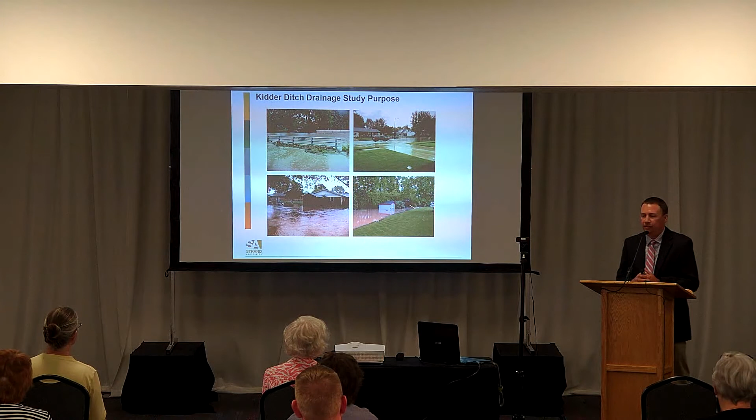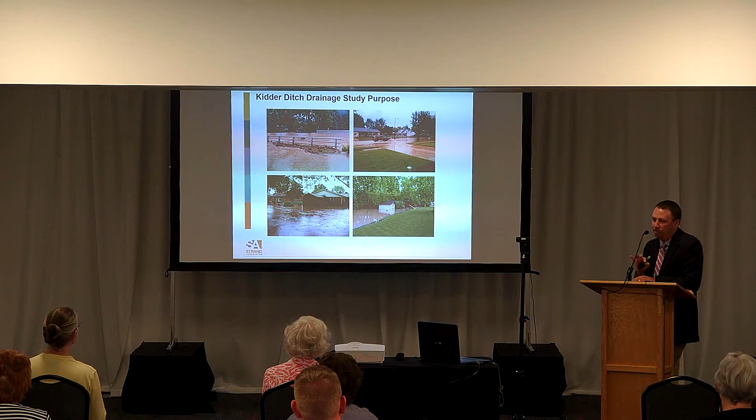So the purpose of the drainage study, we've got pictures of flooding here. Some of these came from the city, some of these came from you all as part of our outreach efforts. It seems like the primary issue that is being dealt with throughout the watershed along the ditch is flooding issues. So some of the pictures here, I believe the picture on the top left is the bridge at Maple Crest Drive, which has been prone to overtopping on several occasions.

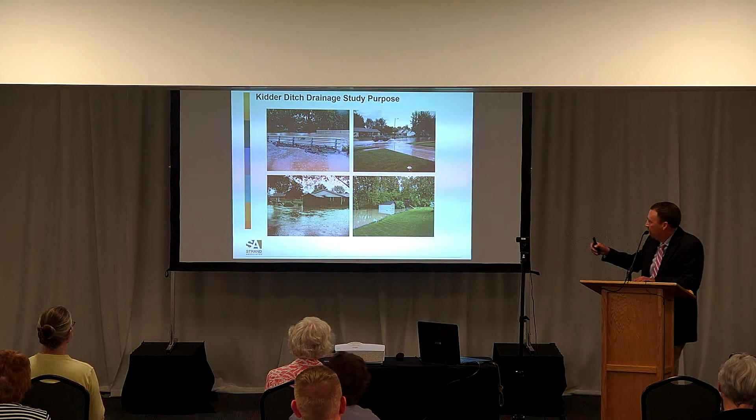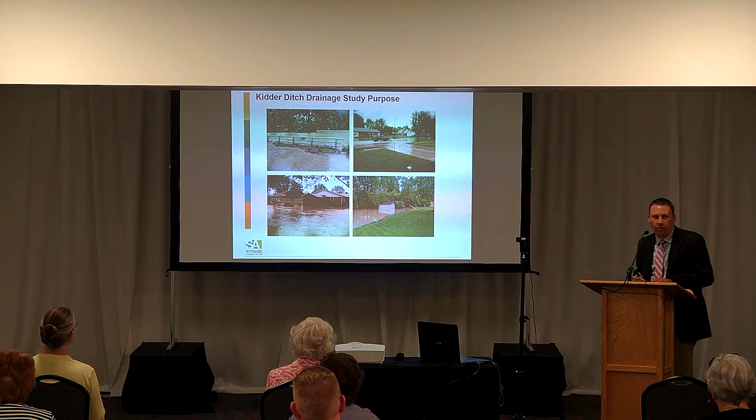Picture on the top right, some of the flooding along the streets that happens during severe rainfall events. And then along the ditch itself, the bottom two pictures, as that water comes up in the ditch, how it does extend out into the yards and then recedes after the rainfall event. So the primary focus of our drainage study really is evaluating the flooding conditions along the ditch itself.

So the limits of the study, this map went out, I think, as part of the invitation to this meeting, that just show the limits of the study. So on the map here, Kidder Ditch flows in a southern direction. Our study went all the way up to DeWeese Road to the north, all the way down to Staunton Road to the south.

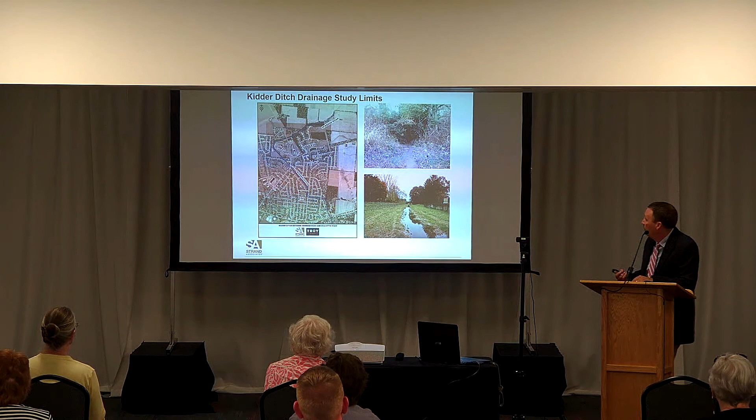So the pictures here on this slide show some example photos of what the ditch looks like, both at the upstream end and then as you work your way to the downstream end. So kind of towards the upper reaches of the watershed, it's a very small ditch, but then when you get all the way down towards Staunton Road, much bigger, wider, broad ditch.

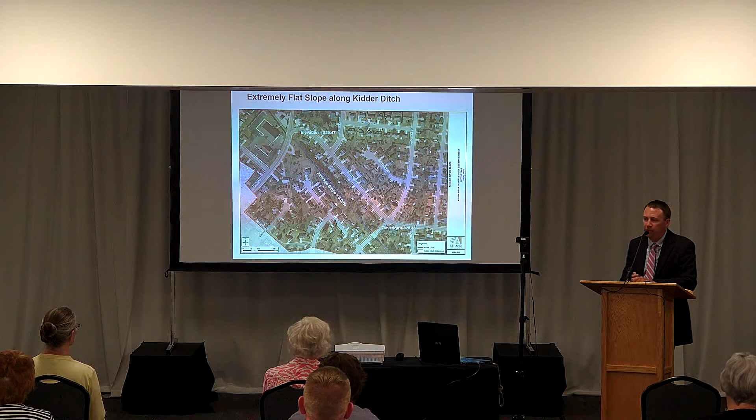So one of the things that was evident, as Stan mentioned, we had a surveyor out in the field collecting a lot of topographic data, cross sections along the ditch throughout the whole limits of the study. Portions of this ditch are extremely flat, as I'm sure you all are aware if you live next to the ditch. But in this particular case, what we're showing here between Market Street and Maple Crest, the elevation of the ditch itself really only drops about 1 foot over about 1,000 feet of length. That amounts to a 0.1% slope.

So from an engineering standpoint, when you're talking about a very, very flat slope, it's just a little bit more challenging for that water to be conveyed, when normally we're looking for something with maybe a 0.5% or a 1% slope to get the flow moving a little bit quicker. So that is a constraint throughout this ditch, is just the flat topography that really sometimes limits the amount of conveyance during some rainfall events.

We also took note of all of the bridges and culverts along Kidder Ditch. So within the limits of our study, there are 8 bridges. I would call most of them bridges instead of culverts, but there's 8 specific bridges that we took specific measurements on as part of the study and incorporated into our evaluation.

So just pictures, we thought it'd be helpful for everyone to see pictures of these bridges, just in case you're not familiar with how certain portions of this ditch look. But again, kind of working our way from downstream to upstream, Staunton Road at the downstream end, going up to Stonyridge Avenue, Skylark Drive, and Terry Drive.

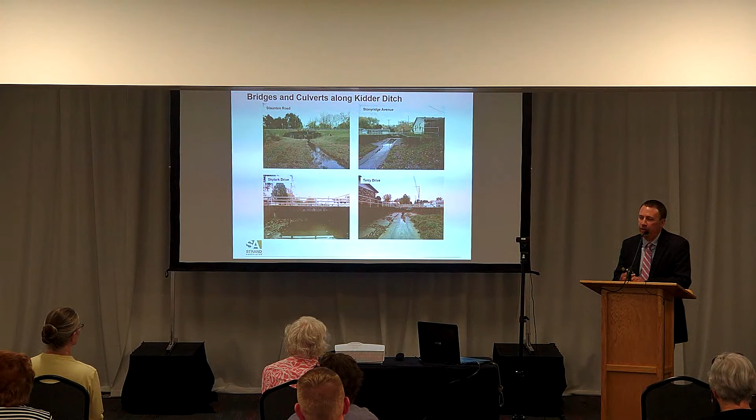So as part of our evaluation, as we mentioned, having someone in the field collecting survey data, we took detailed measurements on all of these bridges and accounted for that in our stormwater modeling of the watershed. These tend to be important because, you know, as the flow from the channel comes in, it does get restricted a little bit as it comes into the bridge or underneath the bridge and then expands out.

And one thing that was evident in some of these bridges, particularly Maple Crest Drive, just the amount of clearance below the bottom of the bridge and the ditch is pretty small. In some cases it's only 2 or 3 feet, where normally you'd want to see a little bit more depth below the bridge to get more flow through it. So again, taking these measurements in the field and incorporating this into the model, which we'll talk about here shortly, was a key component of our evaluation.

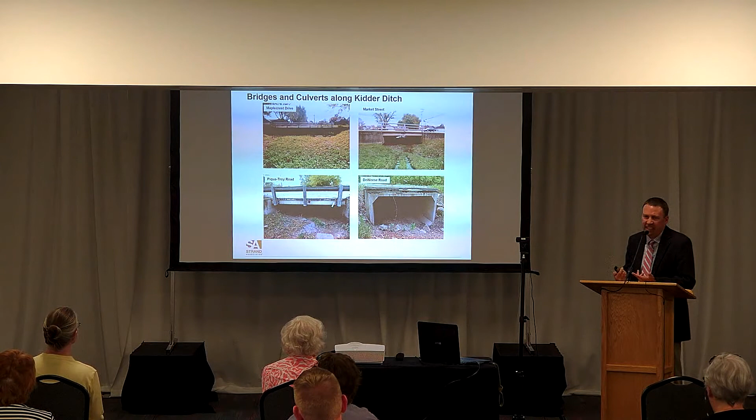In some cases, that drainage easement in the downstream end is as wide as about 100 feet. In other locations, that easement width is about 40 or 50 feet wide. So I thought it would be important to document the location of the drainage easement, just so everyone is aware that there are easements along the ditch on either side of it.

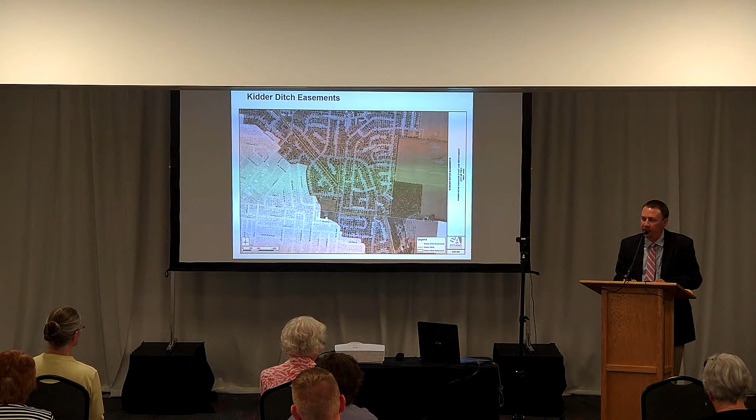So this is more of a zoomed-in image that shows some of those easement lines in relation to the ditch itself. In some locations, that easement width is 20 or 30 feet off of a property line. So again, the maximum total width of that easement may be 50 feet in some locations.

Interestingly enough, some of the things we did note, though, there are some restrictions within the easements. Whether it's sheds, playgrounds, other things like that, that are currently within the drainage easement, they tend to kind of be in the way when there is drainage coming through the easement, where some of the language from the easements does restrict any sort of structures or anything like that within the drainage easement. So we did want to mention that as part of this, and again, we've got the maps to show the easement lines, and we can have some site-specific discussions about those easements as well.

So one of the key parts of our evaluation was the resident survey. Hopefully everyone in the room received that survey back in, I think, January or February timeframe. We did have some specific questions in that survey that really helped inform our drainage evaluation. We did also include a map of everyone's parcel as part of that for you all to mark up how high you've ever seen the water get on your specific property, and we've got some more information on that here shortly, and why that was important.

So that survey went out to about 170 residents along Kidder Ditch. So again, anyone between Staunton Road all the way up towards DeWeese Road, if you have a parcel or a property that is immediately adjacent to the ditch, you should have gotten a survey as part of this. So that went out to about 170 individual property owners. We did get right around 70 responses back.

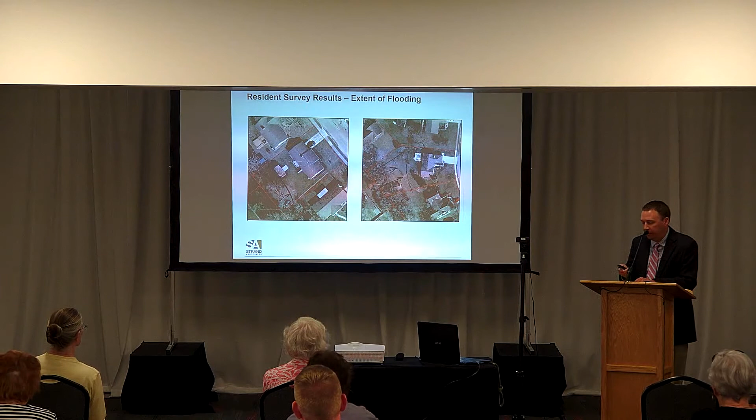So what we did with that information, more in the graphical format, is take all of that information and create this map that shows, based on the responses, how high the residents have ever seen the water get during any rainfall event.

And again, this is a very important piece of information, and we'll get more information here. I'll explain in a little bit more detail here shortly.

So the May 2014 rainfall event, this was another critical question on that survey. One of the things that we had heard from the city was, there was this big rainfall event back in 2014, May of 2014. Portions of the interstate had to be shut down because there was so much rain during that rainfall event. You see some quotes here from ODOT, categorizing this as a 1,000-year rainfall event because there was so much rain. So parts of the interstate were shut down, both north and south of the city.

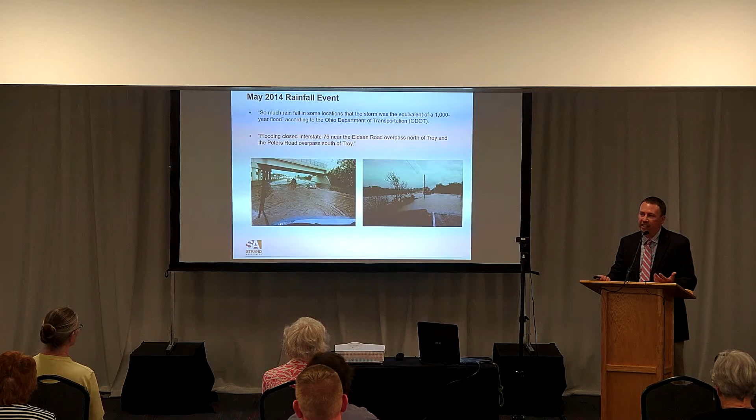So we felt like this was a key question to ask, knowing that this was a pretty significant event. You know, what sort of issues did you experience during that event? Was there any sort of primary structure-related flooding as part of that?

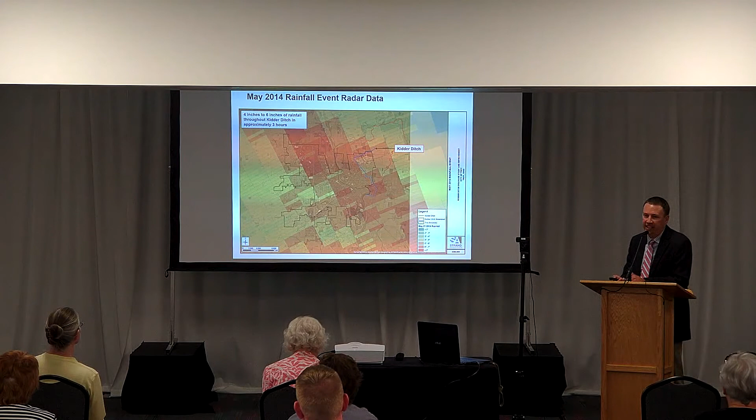So as it relates to Kidder Ditch, this is the boundary of Kidder Ditch here, and here's the ditch itself. So within the Kidder Ditch watershed, about 4 to 6 inches of rainfall fell during that event in approximately 3 hours. So again, a very intense, short duration event. And when we look at the spectrum of rainfall events, when we evaluate that amount of rainfall and that duration, that event really was kind of off the charts, so to speak.

So from an engineering standpoint, we tend to think of these rainfall events as a 1-year event or a 10-year event or a 100-year event. I did want to clarify when we make those kind of statements, a 100-year event, sometimes it can get confusing. You may think, well, that's an event that should happen once every 100 years. We look at it more from a probability standpoint. A 100-year event has a 1% chance of happening in any given year. And a 10-year event, for example, has a 10% chance of happening in any given year.

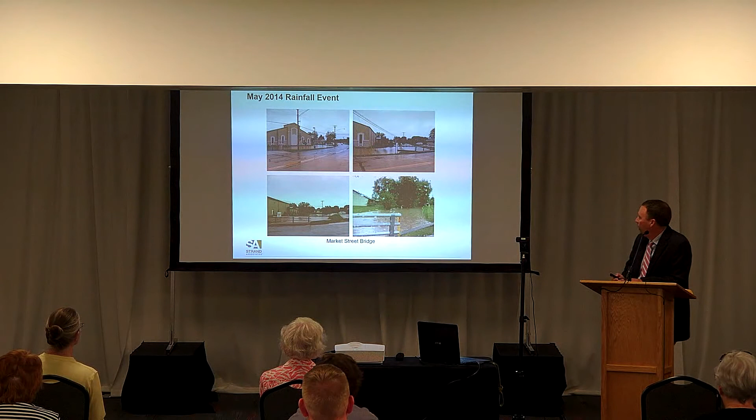So some of the photos we got, and again, this was maybe a combination of photos from the city and photos from you all, looking at that rainfall event. So right now we're near the Market Street Bridge. You see the church upstream from the bridge. There's flooding going on just upstream from the bridge, extending just in front of the church, but no evidence or documentation of actual flooding of the building itself.

Market Street here, you can see how much flow is going on immediately downstream of the bridge. We're not always sure when we get these photos if you're really looking at the maximum peak of when the water got up the highest during the event, but we felt like these were probably pretty close to that most intense part of the event when we look at how high the water got. So the Maplecrest Drive Bridge in this particular event, obviously it did overtop.

So Maplecrest Bridge was the one we showed the picture of where there's only a couple feet of clearance below the bridge. I know we heard a lot of responses related to this particular bridge, and some of you all that live upstream from the bridge, where there tends to be a little bit more frequent blockage of debris. We know the city put in kind of a trash rack structure immediately upstream from the bridge to try to keep that debris from getting collected underneath the bridge.

But that does tend to result occasionally in these really intense rainfall events of water overtopping that bridge. And then immediately upstream, again, you can see how high the water gets, adjacent to the properties, just upstream from that bridge during this event.

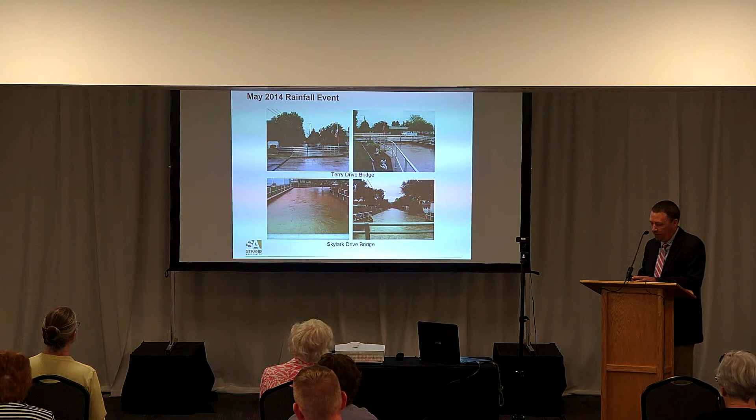The Terry Drive Bridge and Skylark Drive Bridge, these pictures show the water getting really close to the top of the road, not quite overtopping the road. Some of you all may have some more pictures during this event that show it overtopping the road, but according to the pictures we have here, it got really close to overtopping the bridge during the event.

So sometimes this can be a symptom of just too much water in the ditch itself, but sometimes when you see street flooding, and I think we saw this in some of the responses from you all, it can be more of a symptom of just too much flow on the street, and the inlets and storm sewers out on the street can't convey that flow fast enough. So it tends to be a little bit of a combination of maybe too much flow in the ditch, but then also too much flow on the street itself has a hard time getting into the storm infrastructure system.

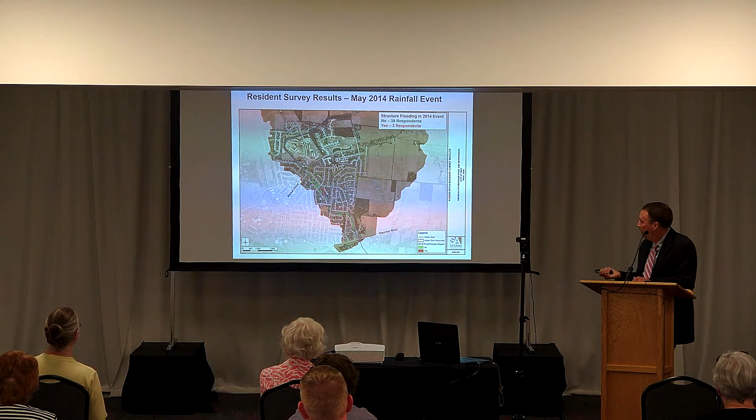So in summary on that particular event in May of 2014, out of the responses we've got from a structural flooding standpoint, 39 of the respondents said no to the question whether or not you had structural flooding, and only 3 responded yes, again, kind of in that Scenic Court area. So the general outcome we saw from this particular event, a very significant rainfall event, yet not a lot of widespread flooding of houses or structures themselves.

So when we talk about these different rainfall events, the industry standard for stormwater management, there's different components of the stormwater conveyance system, whether it's the storm sewers or piping network, the open channel system, detention or retention basins. Those are typically designed and sized according to these different rainfall events. So typically a storm sewer system is designed to convey a 10-year event, and you check it for a 25-year event to make sure there's not widespread flooding. Same thing with an open channel system. Detention and retention basins tend to be designed for bigger, up to 100-year rainfall events.

So this is kind of the industry standard when it comes to sizing and designing these types of stormwater conveyance systems. So, quite frankly, when we get these rainfall events that may exceed a 100-year event, a lot of these conveyance systems weren't really designed to convey anything that large. And it can be challenging to do that because it gets very costly to put in really large storm sewers and really large conveyance systems for those really extreme rainfall events.

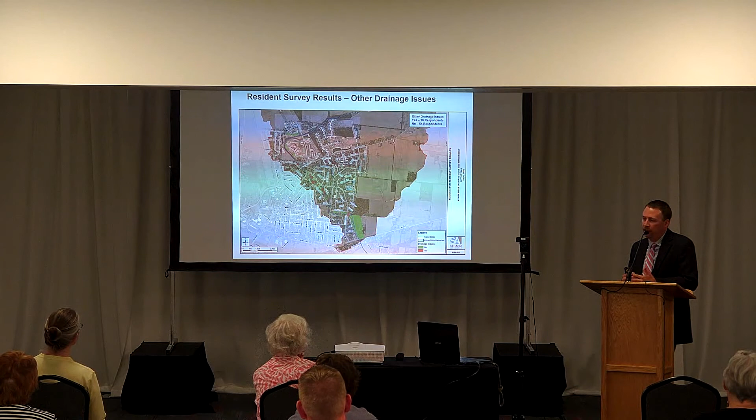So other drainage issues, we also had a question on the survey about have you experienced other drainage issues, and we'll touch upon those here in a minute. But 54 out of the 70 respondents answered no to the question. 16 respondents answered yes. Some of those comments related to that question were tied towards maybe some erosion in the ditch on your property, maybe some collection of debris.

Once you get a rainfall event, there's some debris coming from the ditch, that drainage subsides in the ditch, but then you're left with some debris on the property itself. Localized street flooding, we showed the pictures of that. And then there were several comments about flood insurance, which we'll touch upon here in a minute as well.

So Kidder Ditch stormwater modeling: as part of our evaluation, we do detailed stormwater modeling, which is basically a term we say for the computer program that we use to simulate these rainfall events to try to replicate what we're seeing in the field. So the watershed itself encompasses over 3,000 acres.

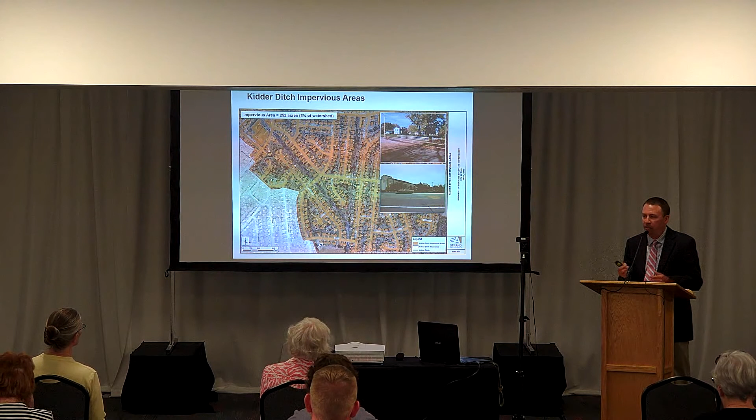Impervious areas tend to be an important component when we do these evaluations from a stormwater modeling standpoint. So impervious areas are anything like rooftops, driveways, sidewalks, roads. Anytime there's new impervious areas installed, that generates more runoff because you're changing it from kind of an undeveloped landscape area to an impervious area. And in the world of stormwater modeling and stormwater calculations, that generates more stormwater runoff. So within the drainage area of Kidder Ditch, there's about 250 acres of impervious areas, or about 8% of that 3,000 acres.

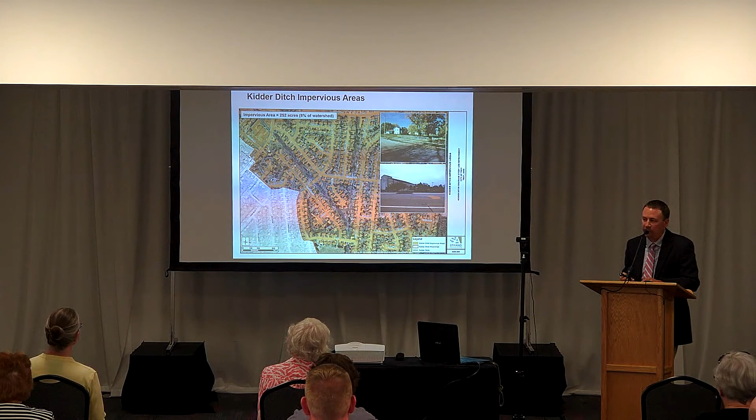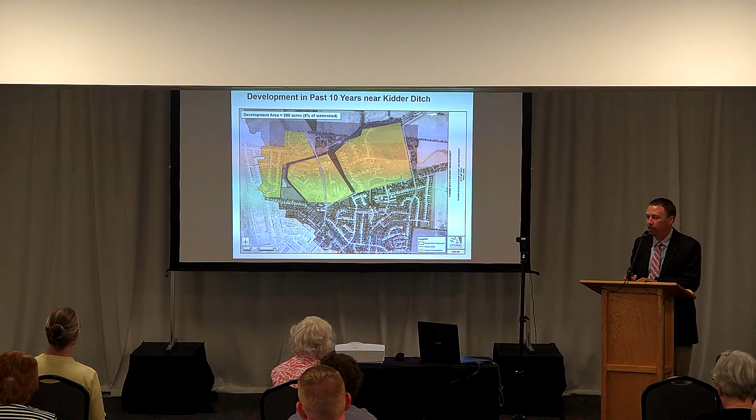So one of the things that we looked at as part of this evaluation is the development in the past 10 years within the Kidder Ditch watershed. So all these areas highlighted in yellow here, the middle part of the drainage area, still south of all of the agricultural area, but just north of the residential area here, has been developed within the past 10 years. And this represents about 260 acres of newer development within the last 10 years.

We did want to acknowledge the city does have stormwater management regulations. There is a stormwater ordinance. It's Chapter 1125 of the city's ordinances, all about stormwater management. And there's very specific requirements within that ordinance that requires any sort of new development or redevelopment to manage their stormwater runoff from a water quality and a water quantity standpoint. And by water quantity, I'm tying that back into those detention or retention basins where, in order to offset all of that new impervious surface that's generating more runoff, you have to construct new detention basins to capture that drainage and release it according to what the release rates were prior to the development.

So there are specific requirements in the city's ordinances that applied to those newer development areas over the last 10 years. So when we look at these areas, the number of stormwater retention or detention basins connected to those newer development areas, there's about 16 of them sprinkled throughout. So older parts of the developed area of the watershed would have been developed prior to any sort of stormwater management regulations, but since the adoption of those requirements, anytime there's new development occurring, these types of stormwater management facilities have to be installed.

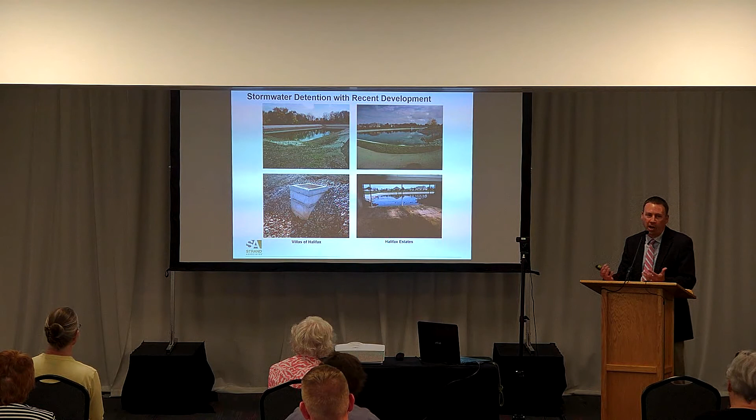So just some pictures of what these look like, big retention ponds. Some of them are dry detention basins that look dry. They fill up with water during a rainfall event. They're all designed with these outlet control structures that are specifically designed to regulate how much flow goes out of the detention facility, all in the context of trying to minimize the impact downstream.

So as part of our evaluation from a stormwater modeling standpoint, we did break the watershed down into these 75 different subcatchments. For each one of these subcatchments, we're incorporating how much impervious area is within that watershed, what are the runoff coefficients, how do those impact the magnitude of peak flow rates in the drainage coming from the watershed, and all of that information gets incorporated into the stormwater models that we use to simulate the flow.

So some of the modeling results, and I know some of you have already started looking at some of these maps over here that we've got on the boards. So the images here in the presentation are represented over here with the maps as well. So after the presentation, we can talk through some of the specifics of these.

But one of the things that we noticed as part of our evaluation, the FEMA floodplain mapping, the 100-year floodplain that FEMA has previously developed, does appear to extend well beyond the reality that we've heard from the residents, either based on the survey or when we go back and look at that event back in 2014, that was well beyond a 100-year event, where there wasn't a whole lot of structural flooding.

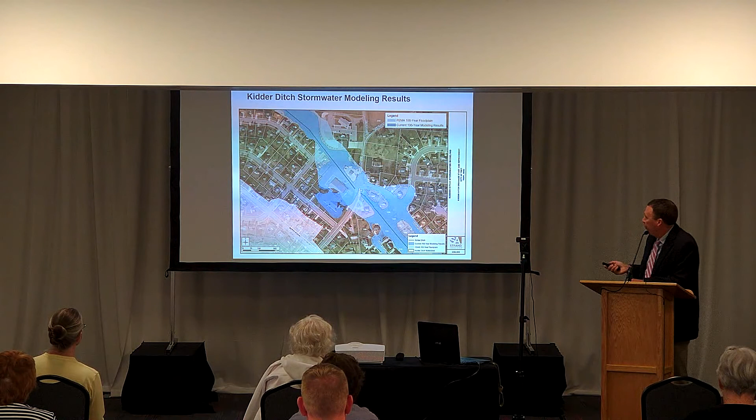What we're seeing in our stormwater model when we run these larger events like the 100-year event is a much smaller footprint of that floodplain. So on all of these maps that follow, this lighter shaded area on the maps is the current FEMA 100-year floodplain, and the darker blue areas on these maps represent where we're currently at with our stormwater modeling for a 100-year event.

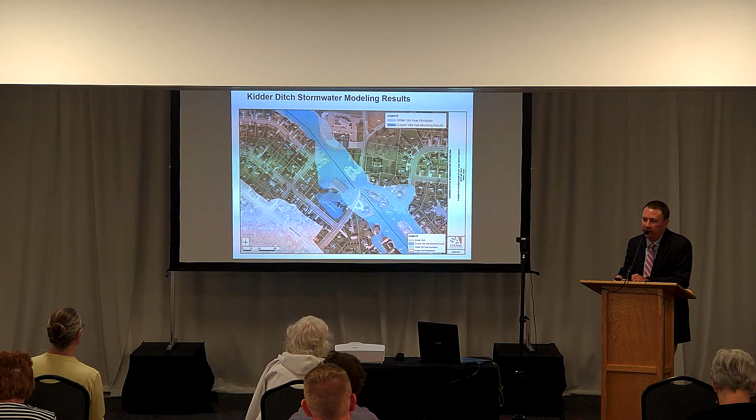This isn't exact, it's not a precise science by any means, as these stormwater models are the best tools that we have to try to simulate these rainfall events to predict how high we think the water could get during these larger rainfall events.

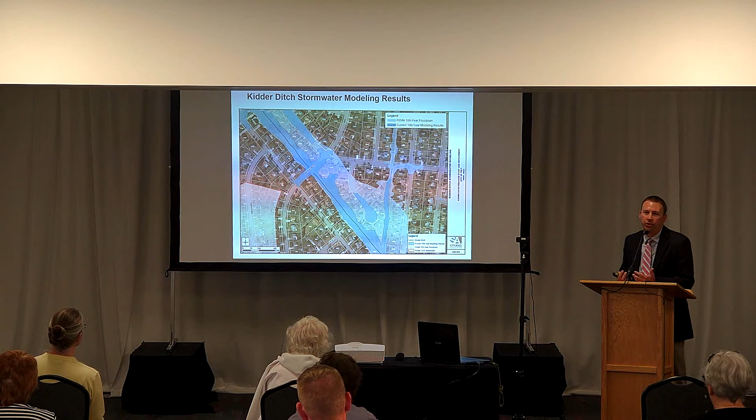So, as we cycle through these, and again, I would welcome everyone to come over and look at the boards and we can talk through specific properties, but we're working our way from upstream to downstream on these maps, and that's how we've got them set up over here. The left side is upstream, and you work your way downstream. The general conclusion that we're seeing here, initially, is that the 100-year floodplain extents appear to be well beyond anything based in reality from what we've seen.

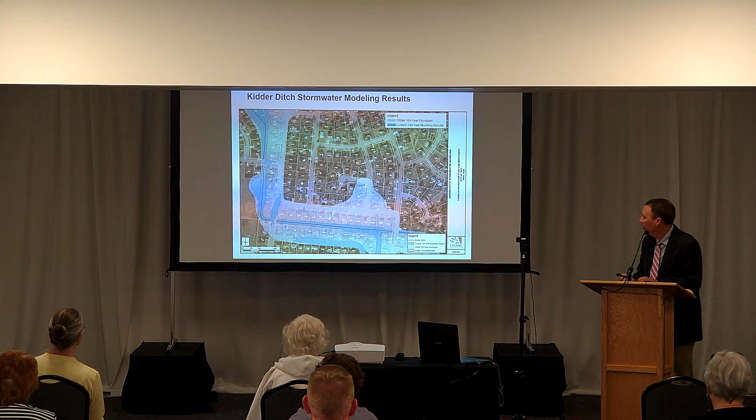So again, here, just some imagery. This is Skylark, Longwood, Mystic, Stony Ridge here. Pretty dramatic potential changes where, again, the FEMA floodplain maps show a pretty broad area within the 100-year floodplain, and according to where we're at with our stormwater models, we're showing a much smaller footprint of that. And this is towards the downstream end as well. So Staunton Road would be down here, just off the map.

So more recently, there was a rainfall event back in March of 2021. When we looked at the rainfall data corresponding with that event, it did correlate to about a 25-year rainfall event. So during our evaluation, we just happened to get a rainfall event that registered on the scale, nowhere near the magnitude of the event back in May of 2014, but still a pretty sizable rainfall event. A 25-year event is a fairly significant rainfall event.